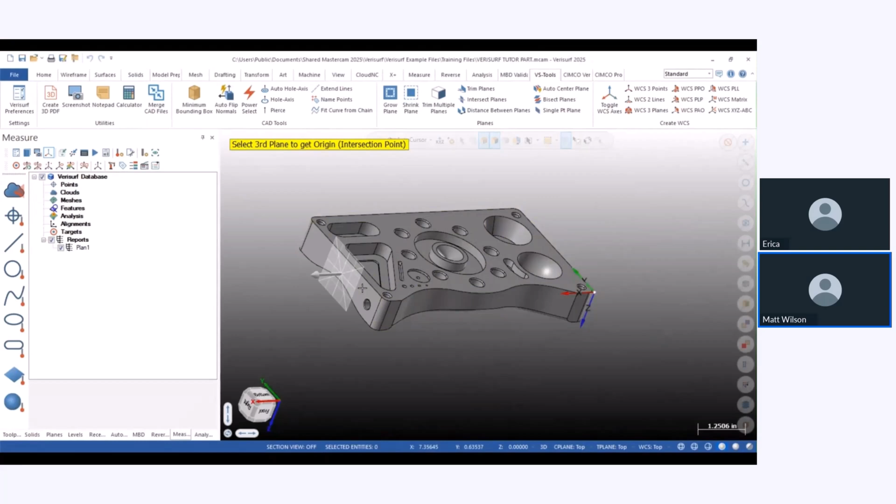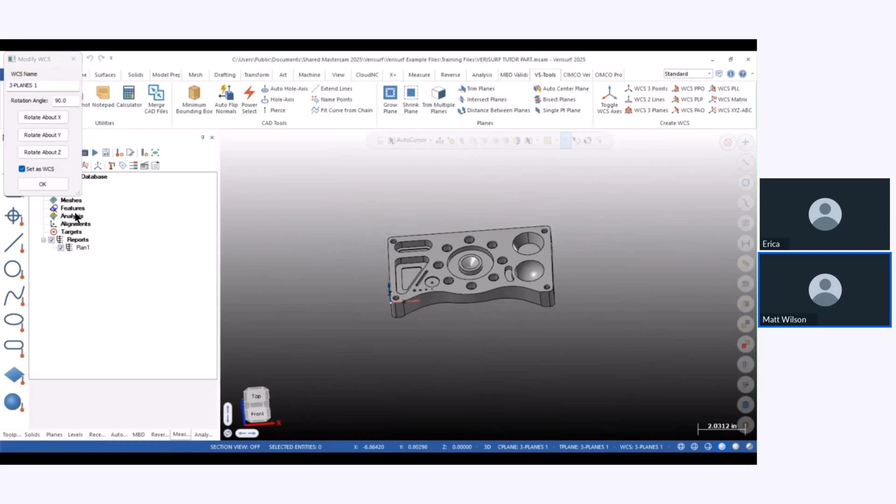So this is not how I'm gonna have it set on the machine, but this is super easy to fix. We just rotate about Z. Now I got my X facing the way I want it. So I'm gonna be looking at the part just like this on the CMM. My Y goes back and forth and my X goes left to right. So I'm gonna press OK. Now everything's how I want it.

I'm going to go into Automate. If you don't have this tab, it's under View and Automate. So we can go here and put this back on Verisurf. First thing I'm going to have to do is add my probe for my CMM. I'm just going to set this to default. So I got that set up now. There's my probe. Next step I like to do is add an auto align. This is going to be for my single point.

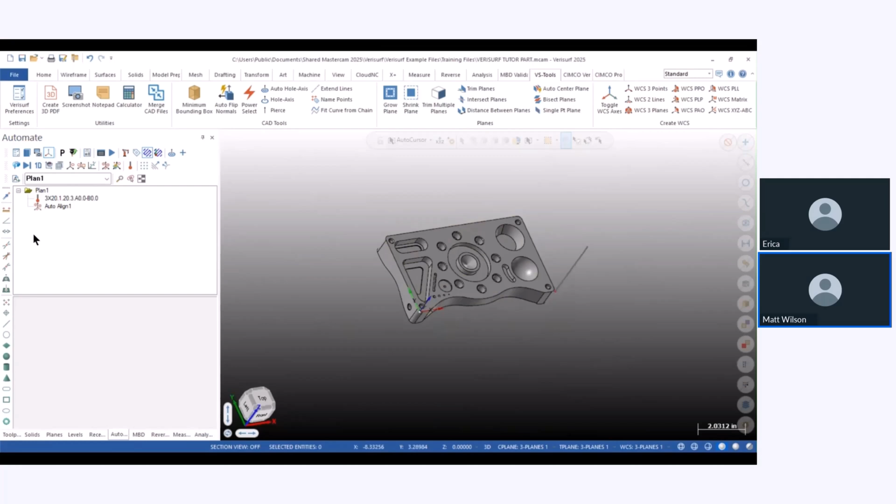I like to do a 1 point manual alignment, which works as long as your part is set up correctly to your WCS. I'm going to double click on this, make sure I have start device from base selected. That is going to mean that it clears all the alignments prior. So it's a fresh start, which is very critical on a CMM. I'm going to go in here and add another alignment. I'm going to double click on this one. I'm going to leave this off because for my second alignment, I want to use my single point alignment.

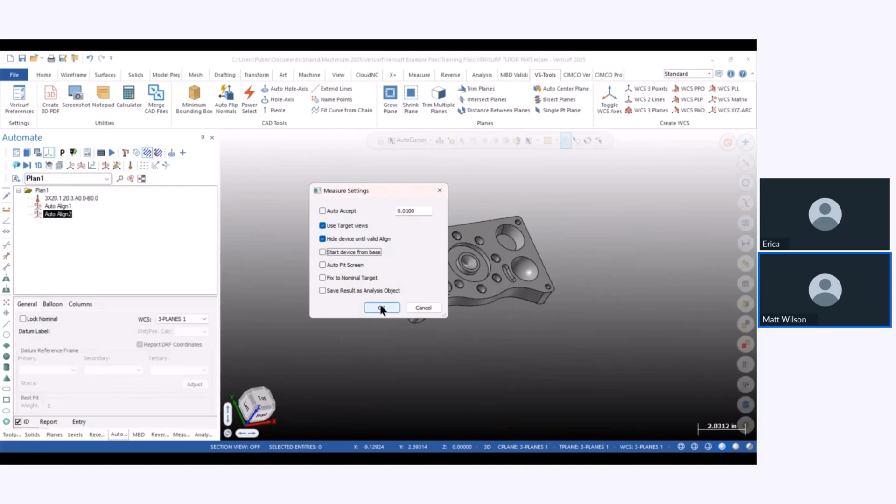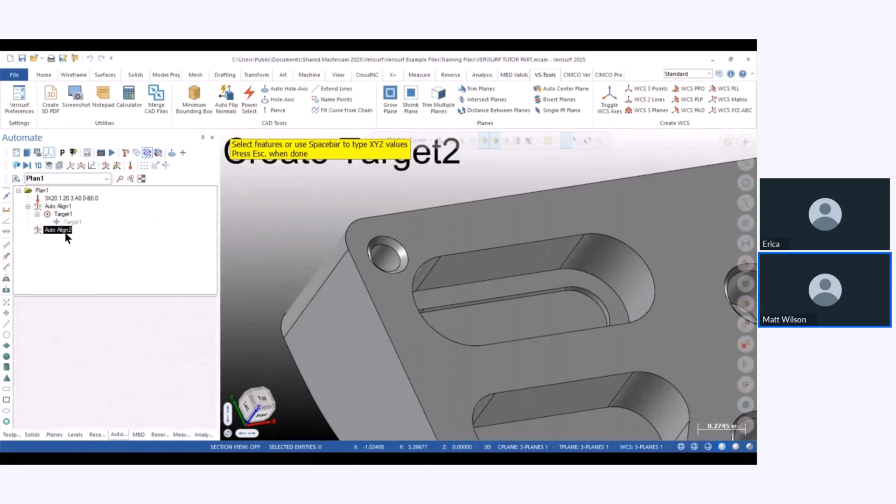So I'm going to go in here, create a target. I like to just pick it in the corner right here. It's super easy to pick up. Okay. I'm going to go in here and right click. I'm going to put this as a manual point so it does not automatically go over there. Then I'm going to press escape. I'm going to right click and create my targets for my automated alignment. I'll go here, here. And as we're doing this, you can see our path popping up on there. So we're going to clear, clear. So everything clears here.

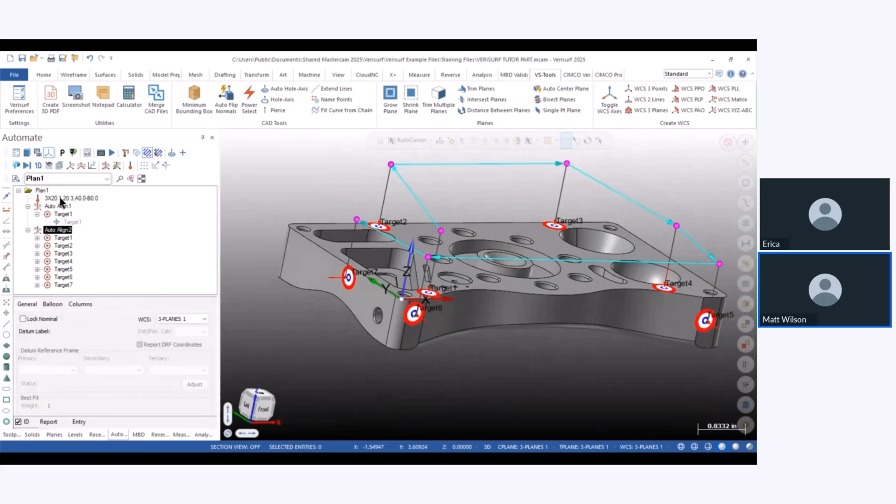Okay, so we're done. We can click on this alignment and see that everything's going to clear. We can click on both of the alignments together and see that my first point is going to go straight over here and it's going to clear. Because sometimes on other parts, this point might not clear and you'll have to add a go-to point in there.

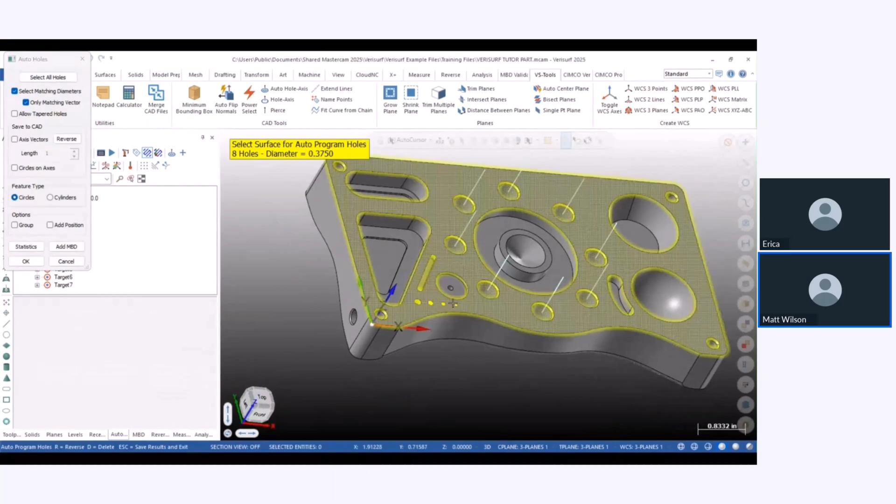So next thing I want to do is I'm going to measure some circles, which is super simple inside of Verisurf. We have this feature called auto holes. And what it does is as I click one feature, it's going to click all the similar holes to it. So if I was to click these or if I was to click those, I'm going to turn these ones off and just use those right now. And I have a feature type. I can do circles or I can measure as a cylinder.

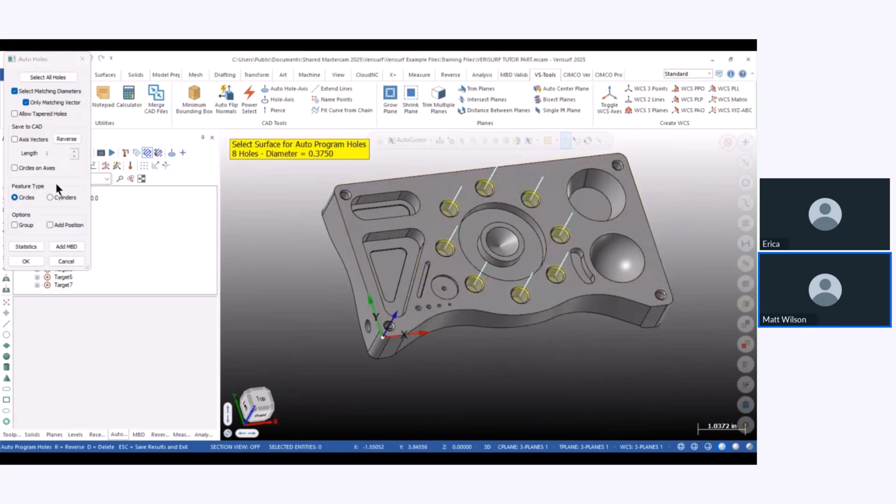And then if this was facing the wrong way with my vector, I could reverse it and now it's facing them down. So I'm going to go up and I'm going to not click all the holes. So we're going to get out of here. I'm just going to press cancel. I don't want all the holes. So I'm going to go in here, auto hole, just click these, vector's facing the right way. Okay. Now it's automatically going to click all those holes in there.

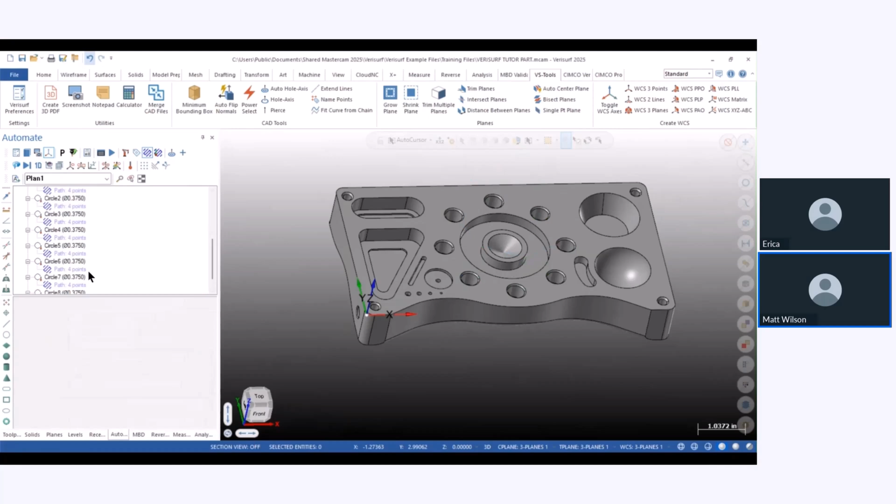And the thing I like about auto holes is that it puts the size in there. So if we were to pick multiple different sizes, it would sort them by size. And we can always come back after the fact. And if we did not like a pattern for the arm, let's say, we could right click and we can sort these by direction, distance, name, however you want to do it. But distance and direction will sort it out for your arm to be a little bit smoother of a process where you're not jumping back and forth across the part.

So I'm going to grab all these and take a look. So I can see that these aren't going deep enough for me because of that countersink. So I'm just going to right click, generate path. And right here, I can see my depth is at 0. So I can just drag those down a little bit. And now they all look good.

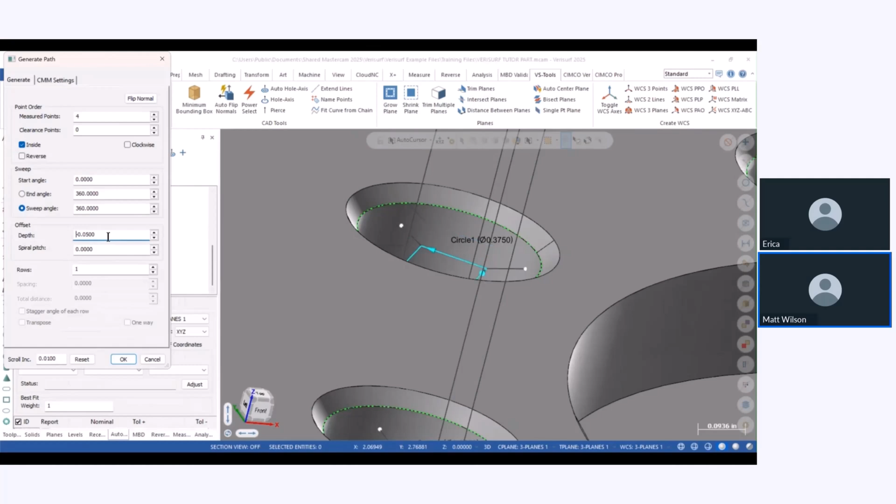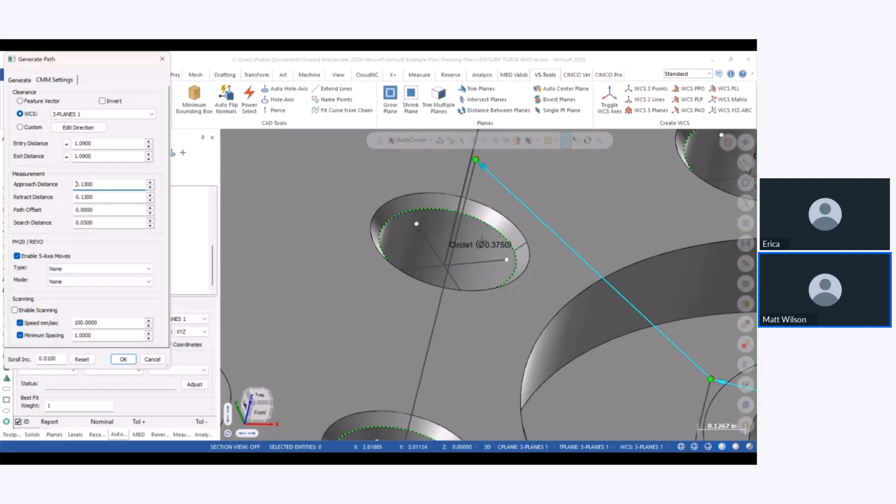I'm particularly programmed for a PH20, which I would like to keep my point right in the center so that my CMM doesn't move, only my PH20 moves. So I'm going to change my approach distance to bring that center point right in the middle. That way I get no movement from the CMM and everything's done with the Renishaw head. Okay, so now those are all programmed.

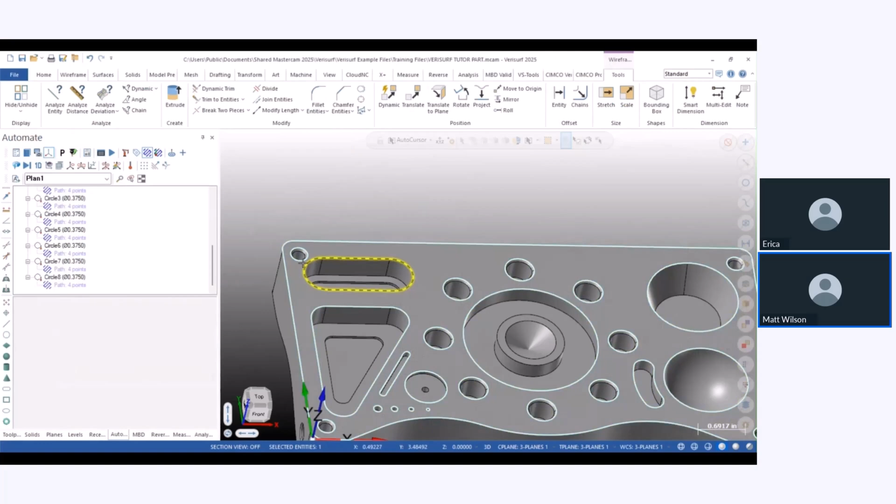Let's say I wanted to do this slot. So there's no wireframe on this right now, so I can just click this feature right here, curve on all edges, cool. Now I got some wireframe. I can click here, plus sign, and it automatically adds in my slot here. Again, I'm at 0 on my depth, super easy to adjust. Generate path, and I go in here and I change my slot, you can see how it's going the wrong way. That's not a big deal. It's just based off of the normal. So we'll adjust that and then we can go negative.

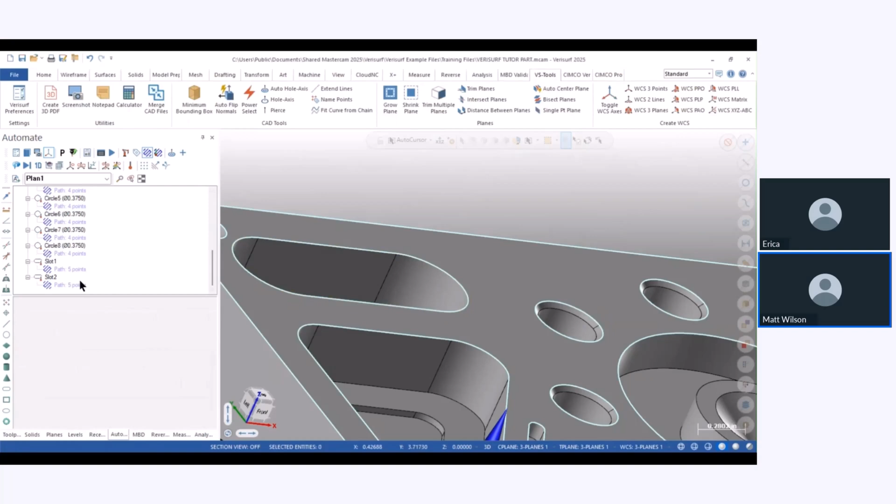And if I press OK and save it, if I was to pick this slot again and add it, of course it went the wrong way again. I just flip my normal and go inside here, generate path. Since I flipped my normal, I need to go in here for it to reference it, but it puts them back in the same spot again.

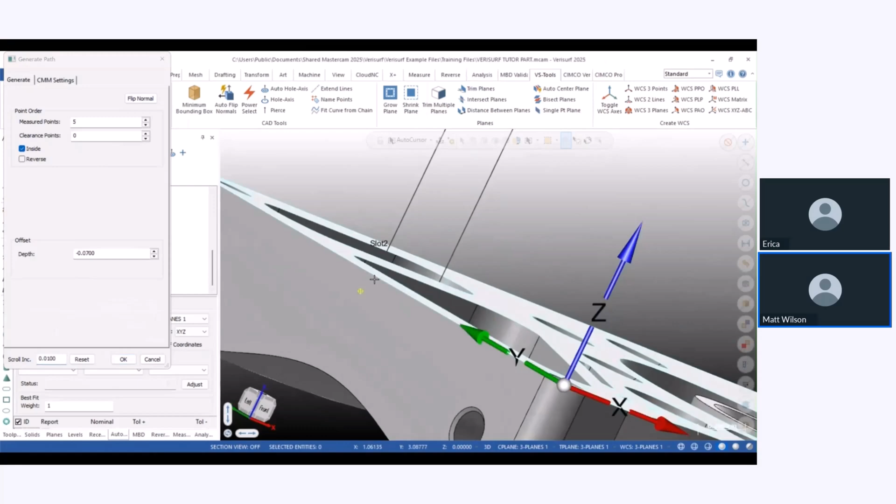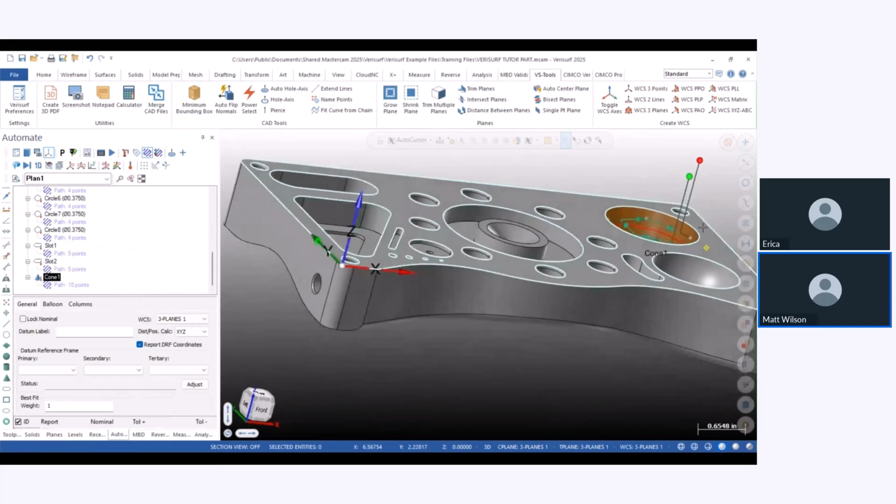So I go here, let's say we want to add a sphere and a cone. We can just add those in there. It's going to automatically generate a path for the cone. We got our path in there. If I want to add this feature, add it. Gave me 5 points. If I don't like those, same thing, go in here, generate path.

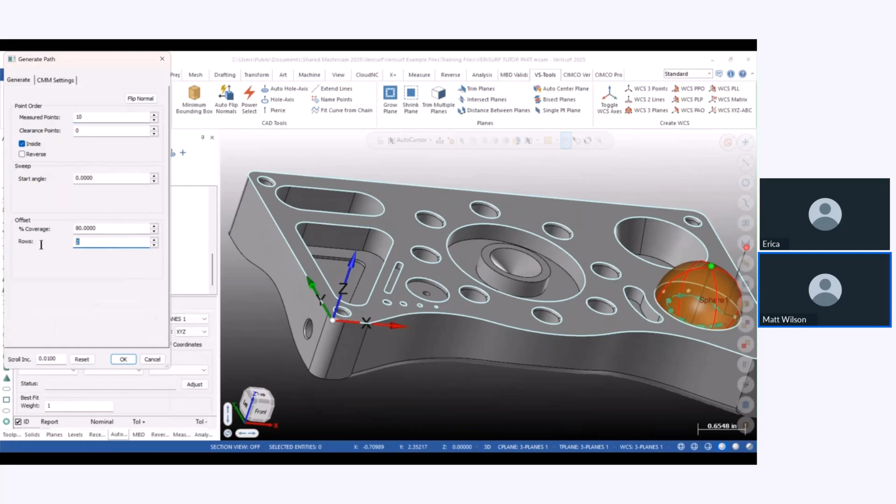Super simple. I don't want 100% coverage because it's going to hit the edges, so I can go, let's say 80%. And let's say I want to do 10 points and 3 rows. So now we can see I got 3 rows and it's not coming right up the edge. Okay. And again, if we want to make sure everything's clearing from feature to feature, just click the 2. We can see that our point going across the top is clearing.

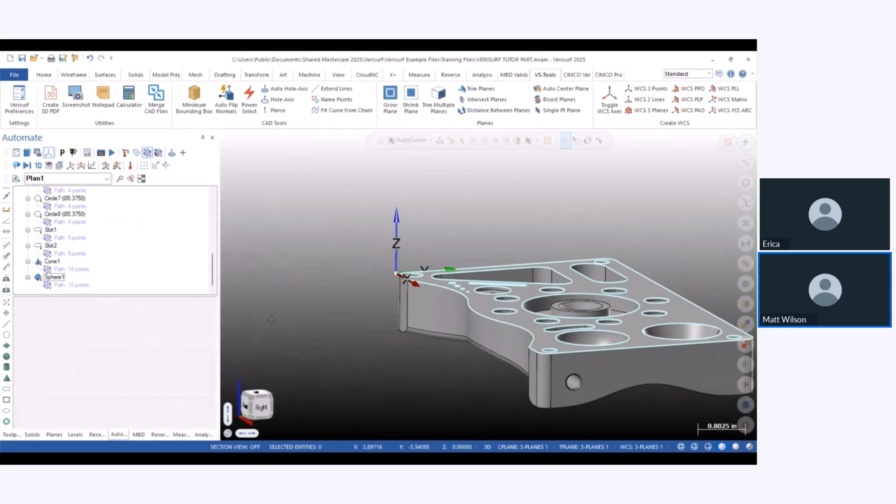Let's say we want to add a surface. We add a surface. And then there's 2 different types of ways of adding surface points. So we can click on here. We can say, let's add some points on here. We can manually place them.

Okay. So now this path is manually placed, or we can click right here and we can do surface grid and click it on here and it does like a pattern. And we can go UV number, and this is the row and the column. So we can see, we can adjust it as we like. And we can stay away from the edge a certain amount.

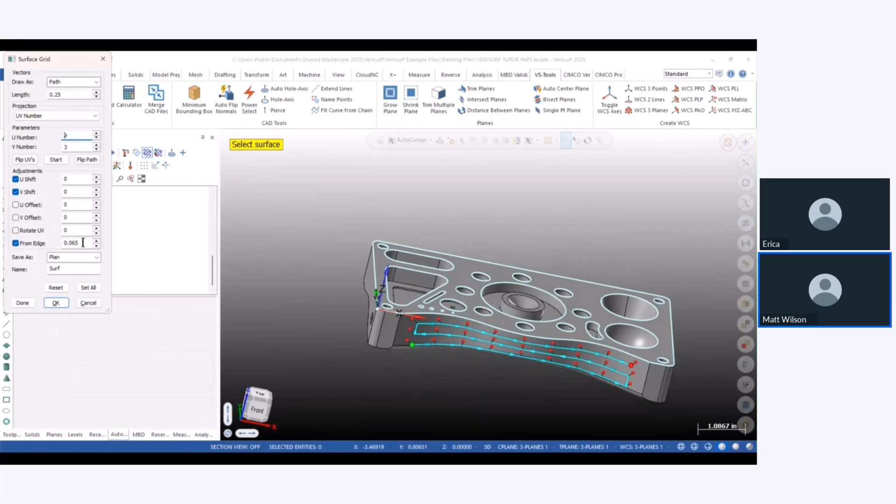We can change this where it keeps it a little bit close to the edge, but sometimes that might not be the best case. So we can kind of shrink that up. Okay. Now we can click both of these and see if they're going to clear. We're all good. We don't need both of them. So we can just delete one of these out.

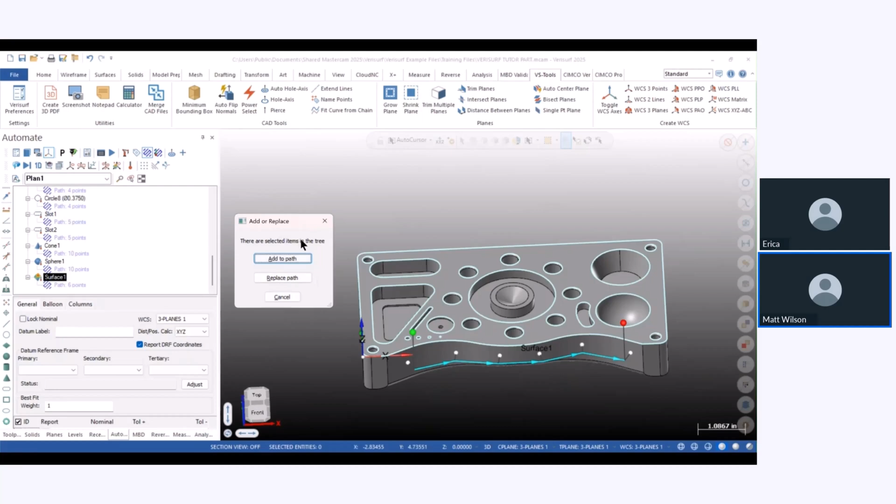And let's say we want to measure this top surface. So we can do a surface grid. Oh, so this popped up because I still had this feature added and it recognized that there were points in there. So it's saying, hey, you already got the points on here. Are you adding them or are you replacing them? I'm just going to press cancel, click off of here, and I'm going to click this top feature.

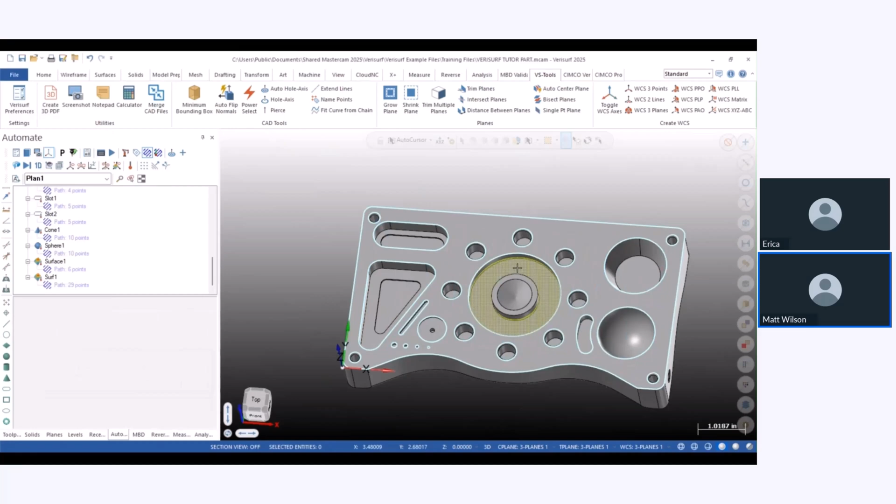So we can see it didn't really put that many points on here because they all ended up clashing. So we can turn this down to, let's say 0. We can kind of adjust these a little bit where it gets more points. And let's just press OK. Let's say some of those points ended up a little bit too close. So let's say this one over here, we don't really like it. It's super easy to edit that.

We just right click on the path and say edit path. And now we can drag anything we would like to around. Like I said, most of the time you're not doing this, but sometimes you might get stuck in a situation where the path is pretty dang good except for a couple points. You can always just go in there and edit those points specifically.

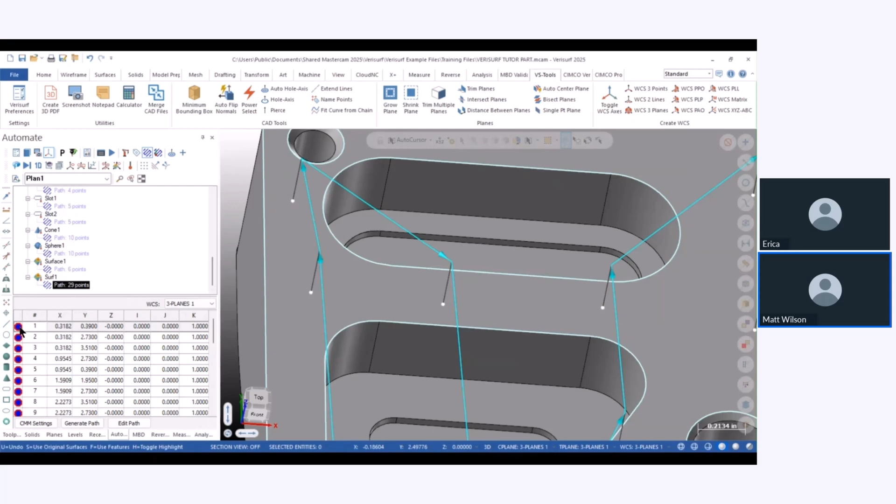And also inside of here, this is a blue point, which means it's going to measure it. If you want some of these points to not be a measured point and you want it to be more of a clearance point, like let's say you're kind of going over something somewhere, we can always just turn that point off, and now this becomes a clearance point. What else we got in here? So we went through features, we went through surface points.

So what else we can kind of do with our plans inside of here with Automate is we could put notes. Notes are super handy for arms. Like let's say you have somebody out on the shop floor running a part that isn't familiar with it. We can create a note. The notes get edited inside the report manager. So we double click on it. It's going to pull us right into the report manager.

Inside of here, we can have this comment do a few different things. We can have it where it just projects a note. Check probe. We can have it where it opens a file, or we can have it where it opens an image. If we use image, it's going to open it within the comment. If we open a file, it'll open it with whatever you got set up in Windows to open an image, which will open it a little bit larger.

What I have a lot of customers do is I have them pull up the print automatically, and I also have them do a comment to pull up a picture of the setup, because that can be a lot of time savings. And it's really nice to have that all in the plan where anybody can run it, and it makes it nice and simple. That's kind of a quick overview of Automate.

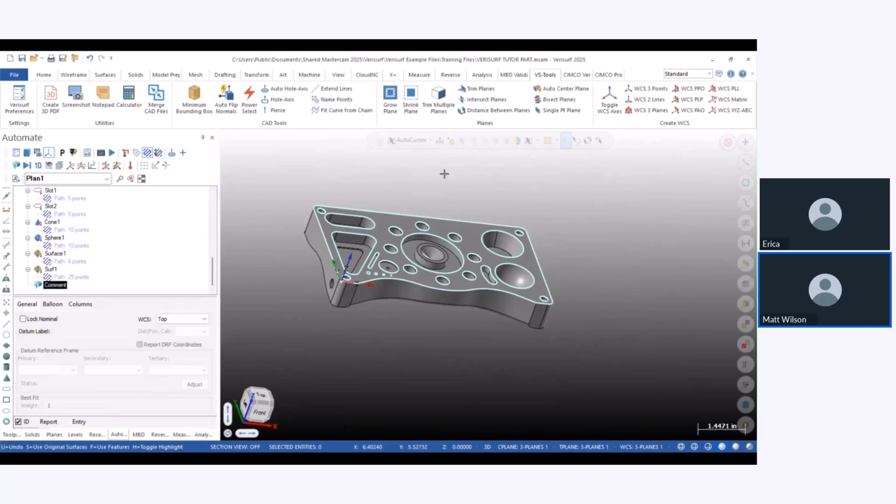You guys have any questions, let me know. And then we'll jump back into something else.

All right, so that was kind of like a getting started, going through the basics. I'm going to take a look at the chat or the questions. If you guys have any questions or want to see anything, just put it in there, and otherwise we'll jump on to the next presentation. See nothing? Not yet. I'm just going to jump on it. We can always go through all the questions at the end.

So I want to show you guys something here with manual constructs and stuff like that. Let me pull this up and we'll go through some more stuff. Okay, so somebody asked about constructed features for print, if you want to do a whole pattern or an angle or a distance. The distance was particularly mentioned.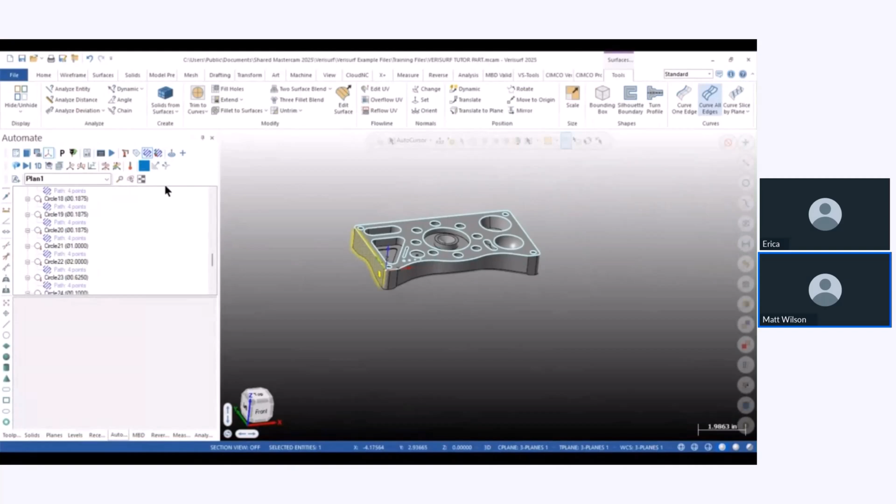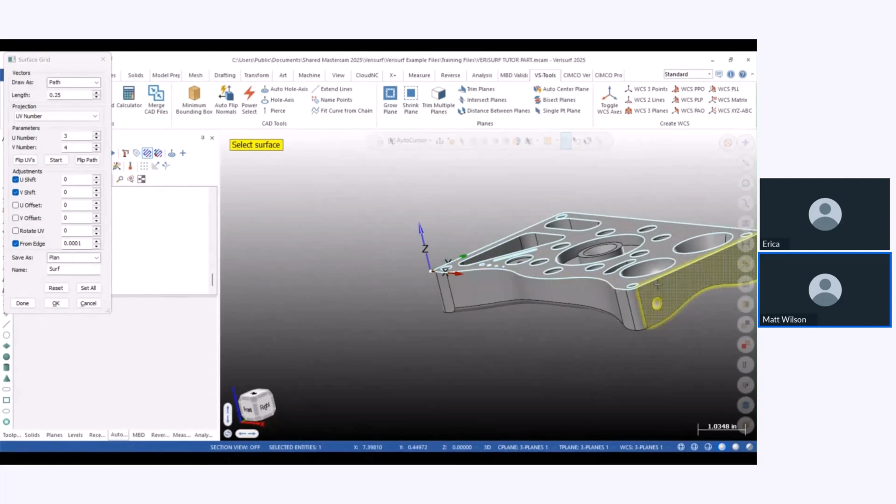That's pretty simple, but let's say we want to do an overall distance on this part. So we would measure this plane right here. Let's go less here and more here. Let's say a couple rows of points. Okay. So we're going to press done. I'm going to go over here, click this surface, done. Let's say we want to do the back and the front.

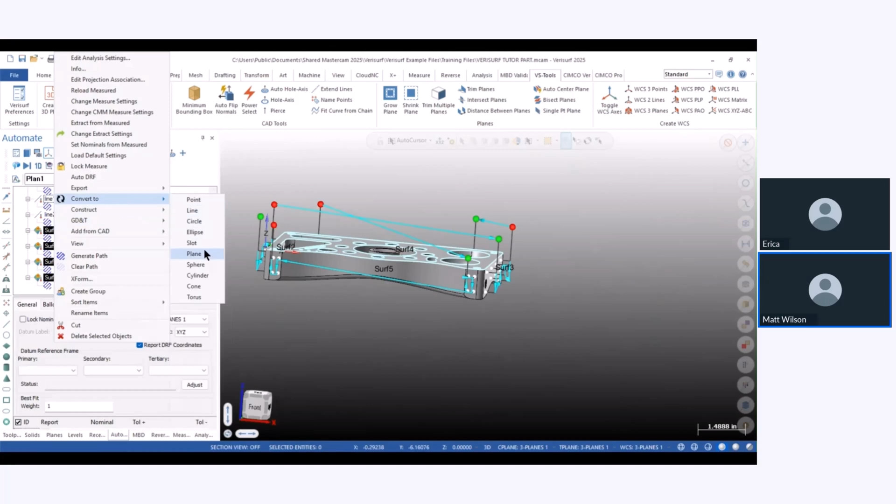So done. And then I'm going to click here and here. Actually, I'm going to unclick here. I'm going to change this a little bit. Let's do a couple points by a couple points. Okay. So then what we can do is we can take these faces, all these, and we can just right click, convert to a plane. They're all planes now.

And it's super easy to pick these two. Right click, construct a distance. So now this is going to give me a distance between those planes. We have a couple different options here. We have a distance in X, Y, Z, and we have a 3D distance. A 3D distance isn't really what we want because that's going to go X, Y, and Z. We just want a distance on X across the two. So we'll just click here, and this will give us a distance on X.

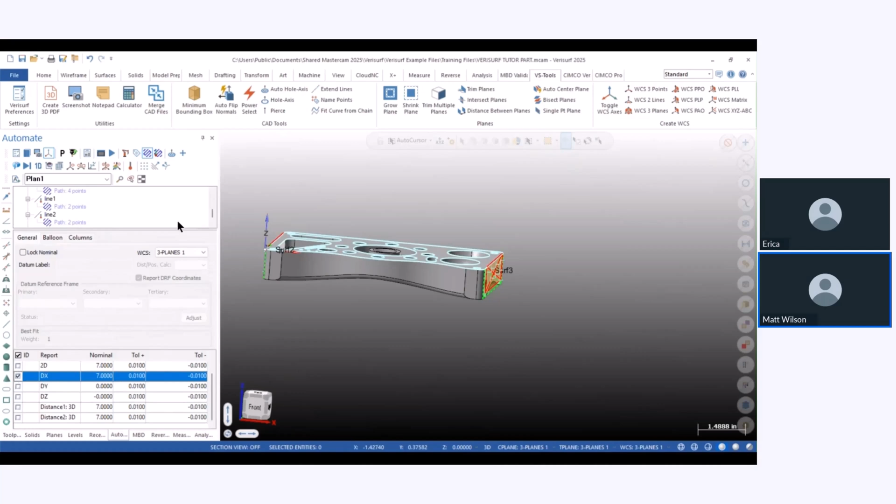Let's say we want to do a couple lines. I have a couple lines right here. Let's say we want to do an angle. So we can take these two lines, construct an angle, and now we go right here. This is giving us an angle between those two features.

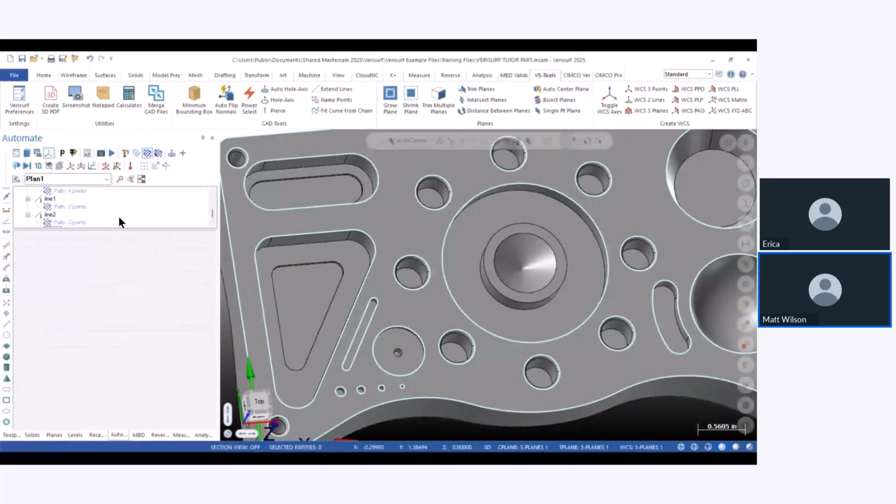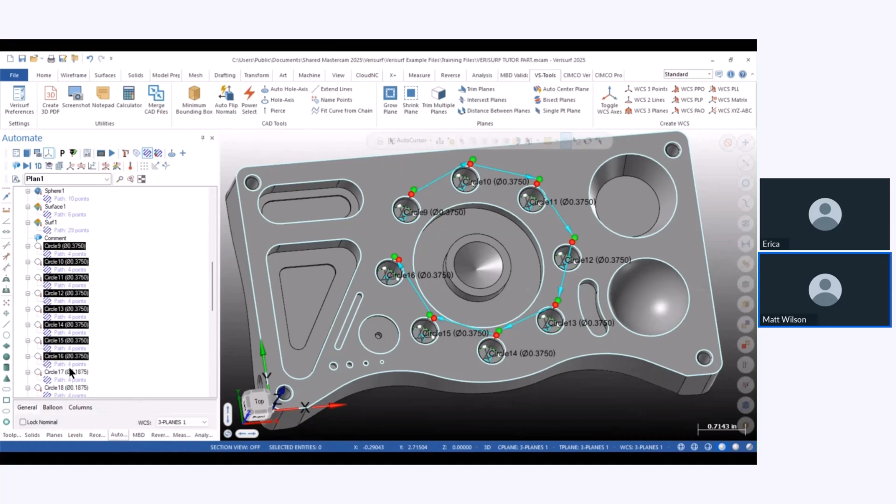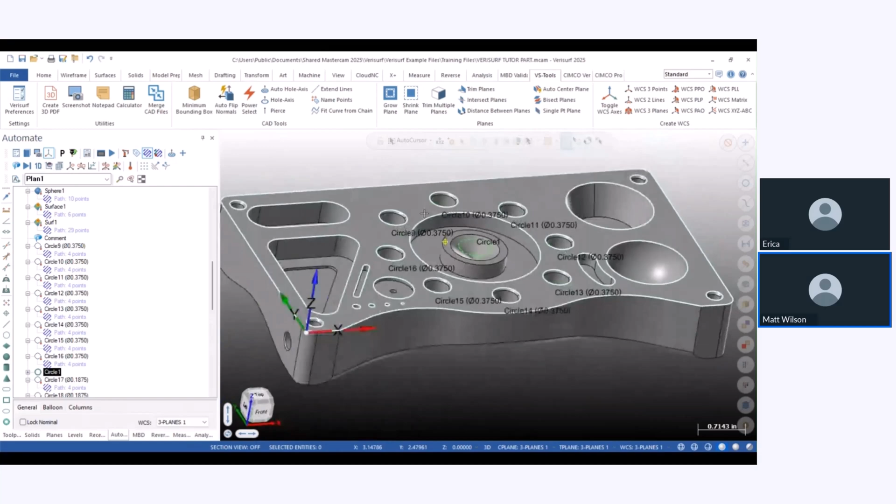If we want to do, let's say, a bolt hole pattern, let me shrink this down. I got all the holes in here. Let's just grab these features. I'm going to grab those and do a right click. I'm going to create a circle. Construct a circle. Now I have a circle that's actually constructed from all these features. So this will be my bolt hole circle.

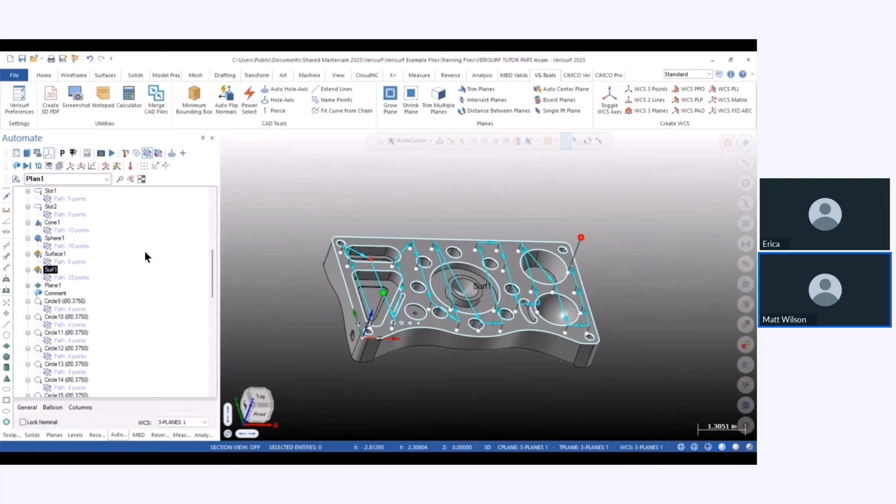If we want to do an intersect, we can also do that. Where did I make a plane? Let's take this and construct a plane off of it. So I'm not converting it, I'm actually constructing. I left that as a surface because I wanted to report out the profile. And then I got this plane here, and I can do an intersect to, let's say, this plane.

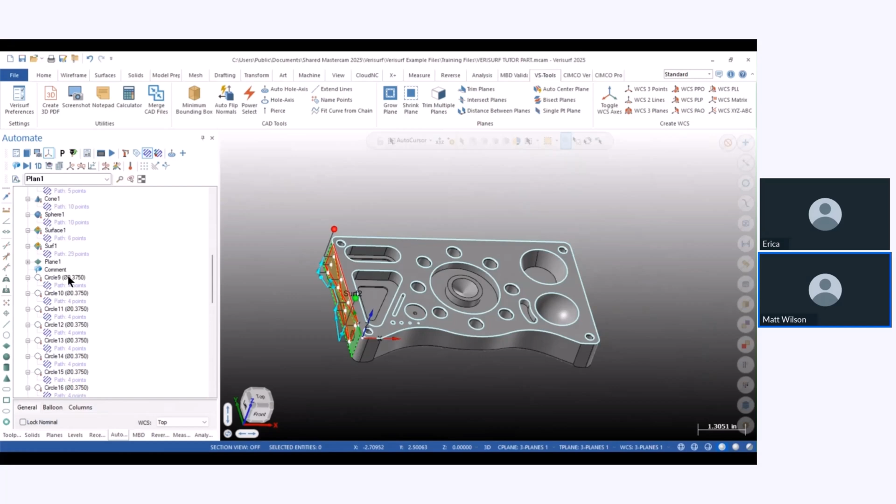I'm going to click Surf2. I'm going to come up here and grab surface 1. I'm going to right click, construct a bisect. So now what I'm going to have down here is a bisect line or a bisect plane from where those intersect.

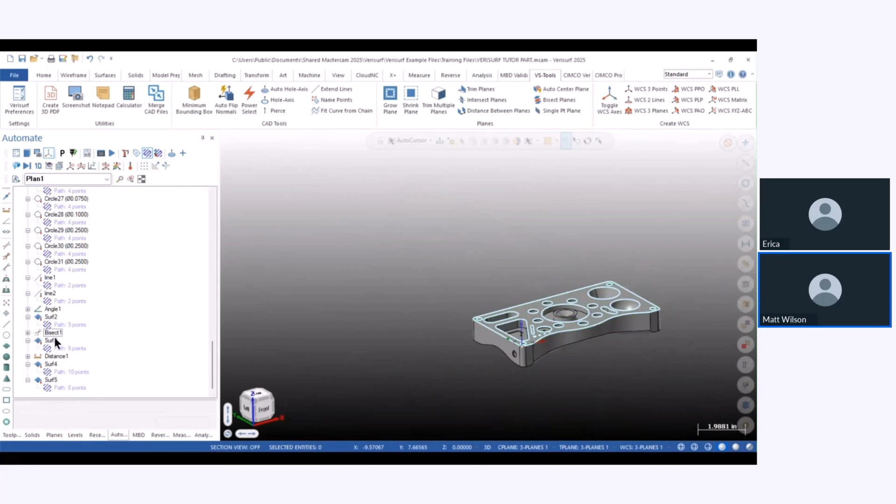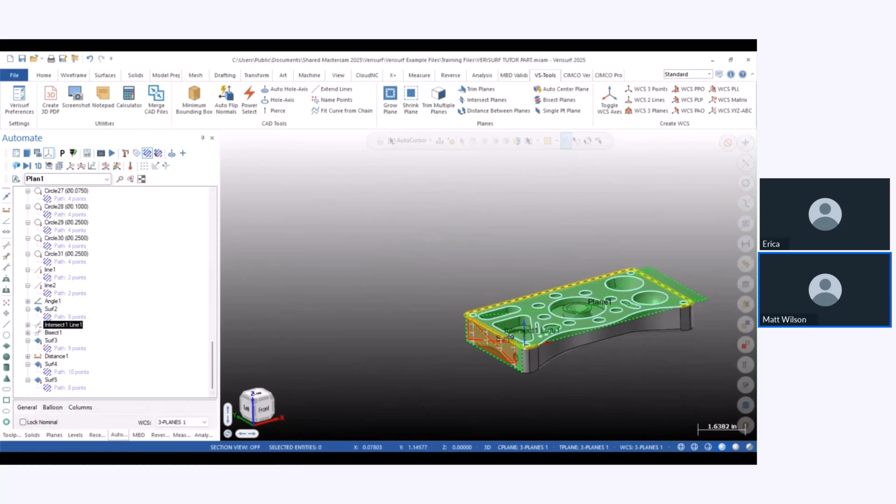If I want to do an intersect, same thing. Pick a surface. Pick the other surface there or plane. Construct an intersect. And on an intersect, I'll get an intersect line. So we can see my intersect line right here on the edge.

You guys just hit me in the comments and tell me if there's any other common constructs you're doing that you might be a little worried about having a way of doing, or how you would like to see it. Just send me a comment there and we'll run through it.

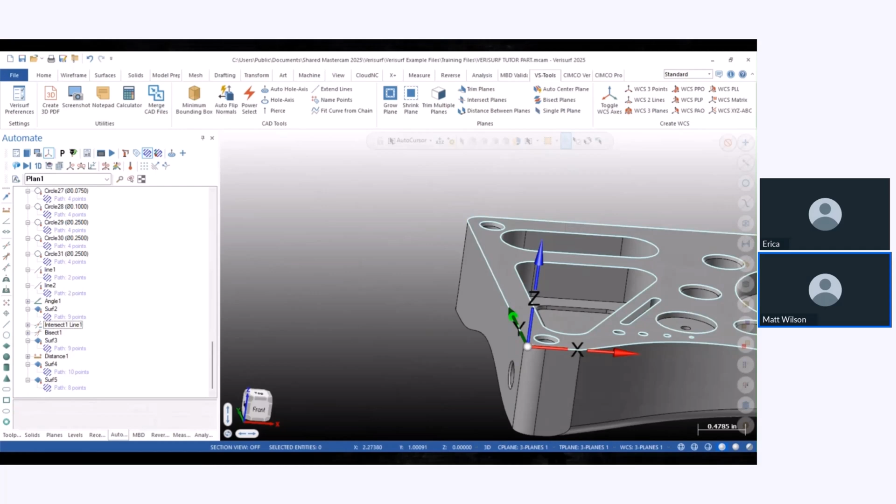All right, so I got a couple different questions in here. In Automate, do you tolerance the same way you would manually? In Automate, do you tolerance? Not quite sure what you're asking, Mike.

I don't know if I can. Let me try this. I'm going to do live answer. See if that gives you control to talk. Nope, that didn't do it.

You still have to enter manually. Well, yeah, so the tolerances you're going to have to still enter manually. Actually, can you show us how you would do true position? Let me show one last thing for Mike, and then I'll answer your question, Jose. I want to show you something: you will have to enter it all manually unless you have MBD. And let me show you how you do that, because that is actually super easy inside of Verisurf. Give me a second. I'm going to pull it up again.

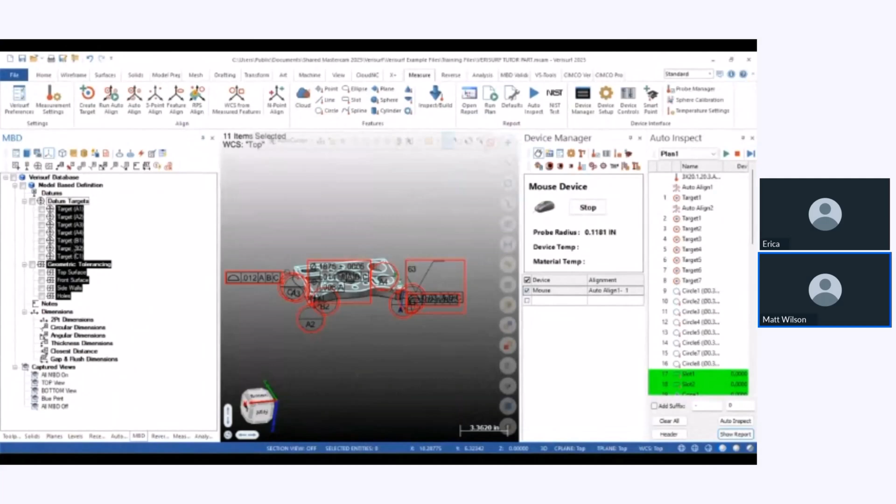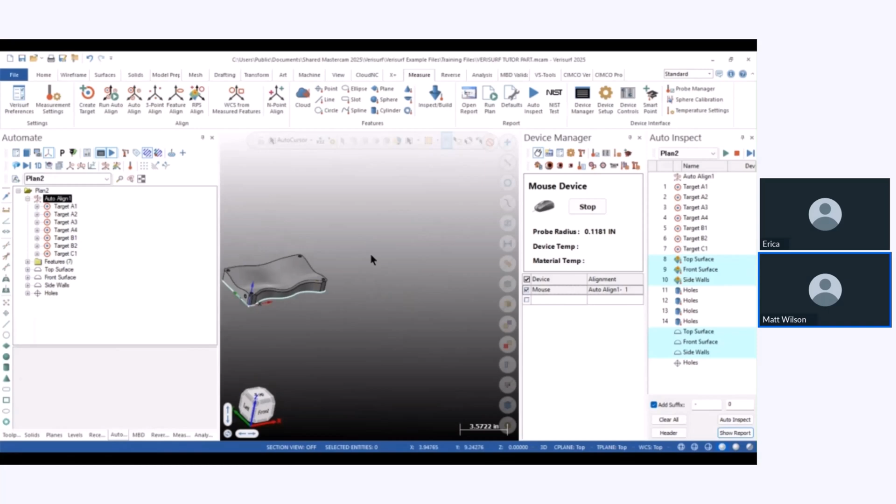Pretty nice feature within Verisurf where all we have to do is grab the MBD, right click, plan, create a plan. What that does is it takes the MBD from the print and all the relationships to surfaces and all that from our GD&T, and it creates a plan. So if we go in here, this plan has automatically generated an alignment. It's automatically generated a surface path on all these, and it's automatically generated paths for our holes.

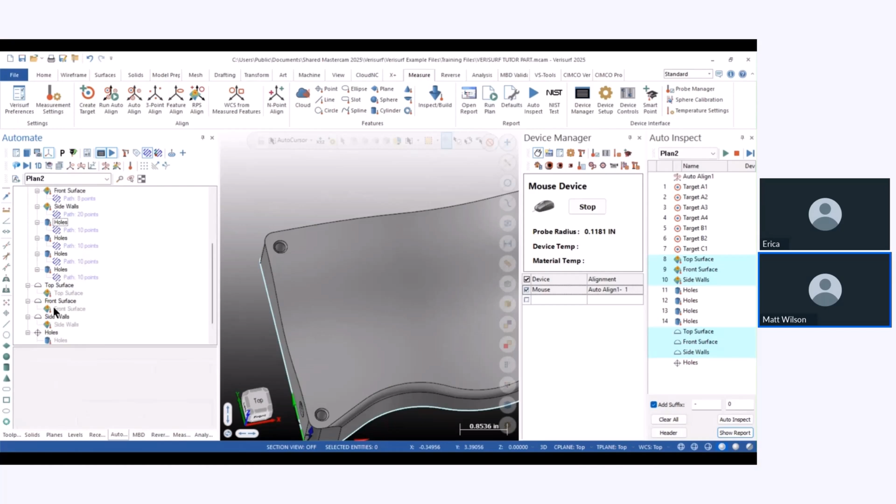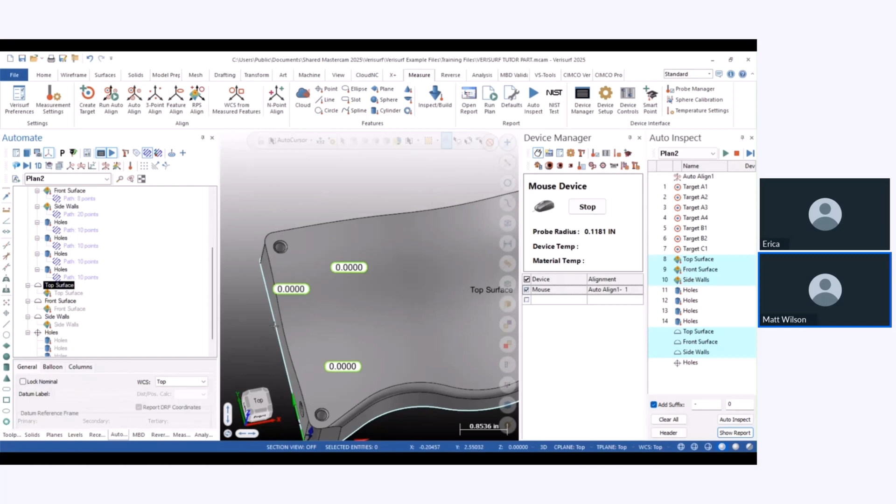And then it also generates all the GD&T callouts for those features automatically for our true positions and for our profiles of the surfaces. And inside of here, what's real nice is it actually grabs the image. It sets our tolerance to that image because this is all assigned within the MBD. So everything is automatically done for us. Tolerance and everything. This report's pretty much ready to go out other than setting up a header. So that was just something real quick I wanted to add in there for you guys. That's a real nice feature for the people that get MBD on their models.

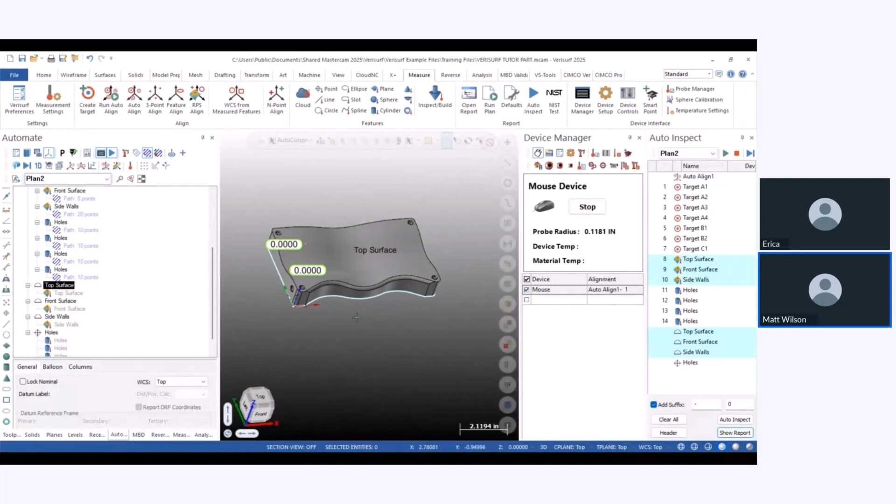All right. So, Mike, hopefully that gave you somewhat an answer. But yeah, you're going to have to manually do tolerances because Automate doesn't know what the tolerances are until you set them. They're all just going to be defaulted because unless there's MBD, nothing's assigned to the features that you're picking. If there is MBD, it'll pick that stuff up. And it says, can you show how to do true position of a couple holes, define datums? Yep, I'll do that. And I also got a question, project, pierce point, and vector point. Okay, so that's pretty simple.

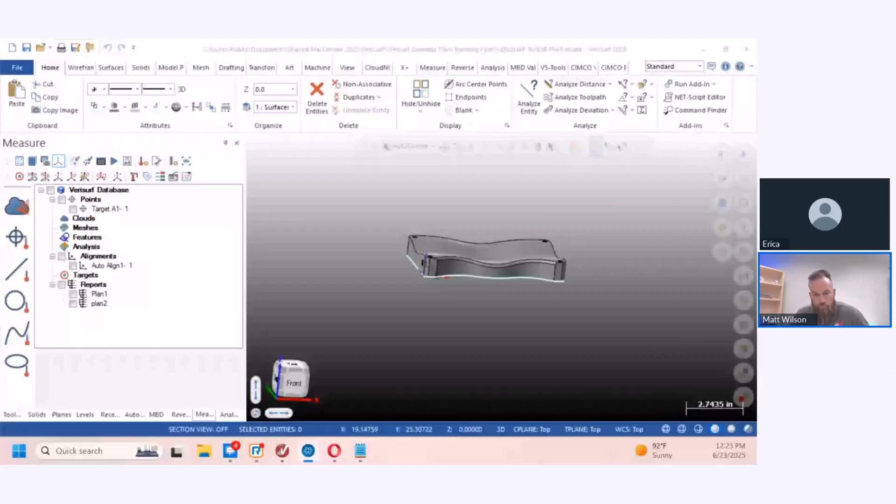All right, let me share my Verisurf. I'm going to put it on my other screen so if you see me looking away. Share. So here's, it might have not. Is it still sharing? Give me a second.

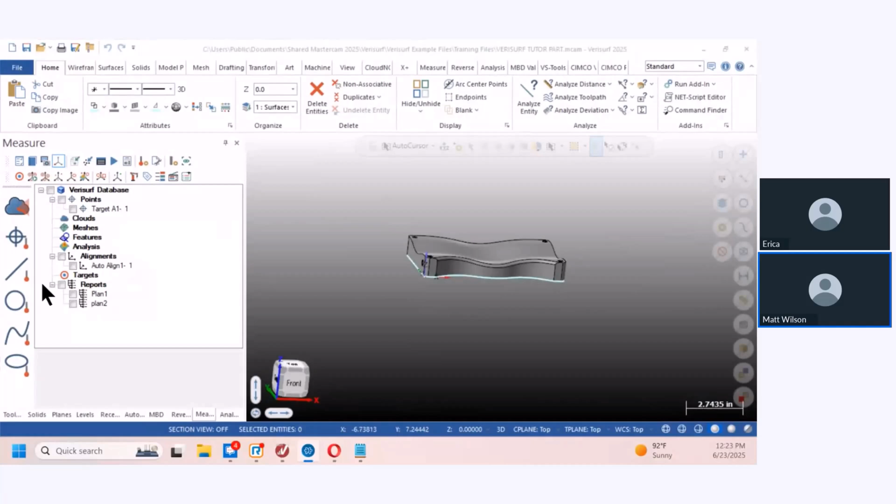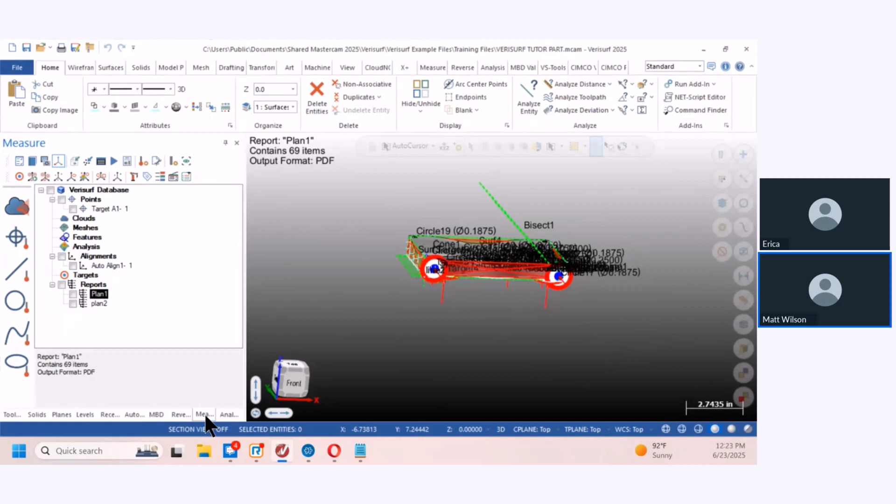Okay, so here's my plan 1 and my plan 2. This is my MBD plan, this is my regular plan. So first I want to show, let's just do a hole pattern or a true position real quick. Automate. Oh, I know why. Automate. So let's say we have plan 1.

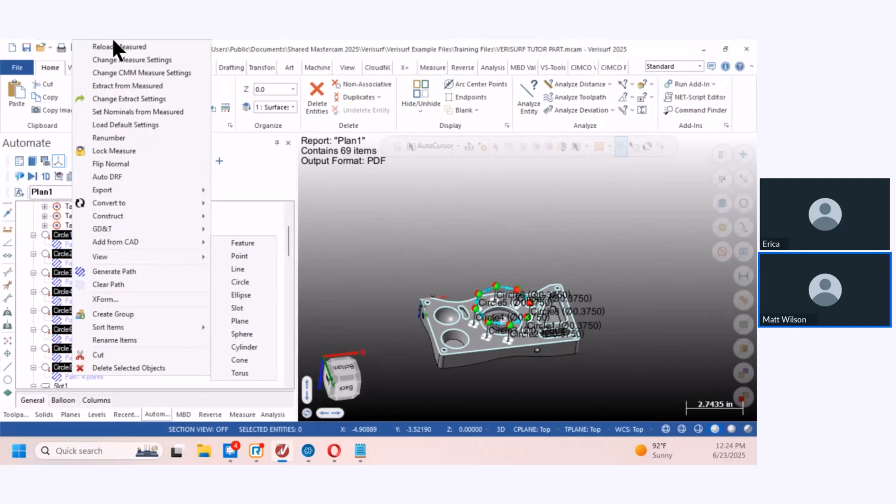So here's a group. This will be considered a pattern of holes that could possibly have a true position. So what we would do is we would go in here, right click, GD&T position. This gives us a true position. And within here, I'm going to open it up inside of the report manager actually, because that makes it a little bit easier to see what I'm doing. So let me put this on the screen.

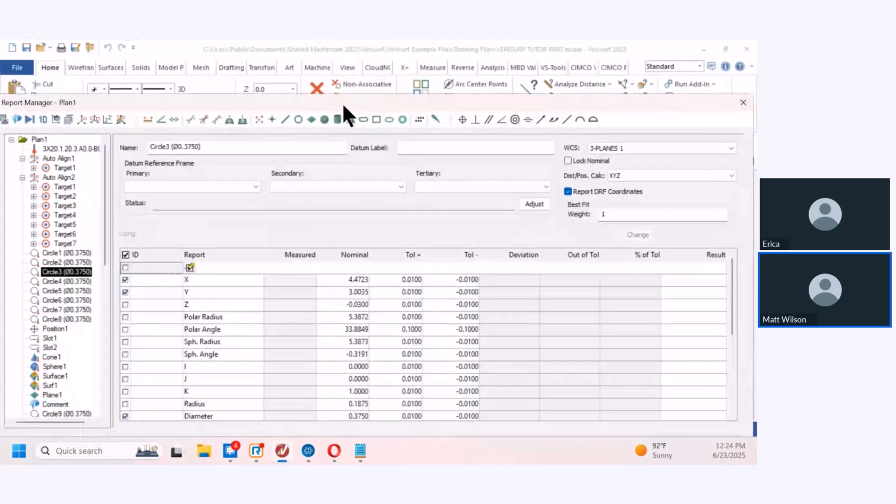So inside of here, here's our position. So we have our composite position, our composite with the MMC ID. So we can do like a maximum material or a composite. And you asked about doing datums.

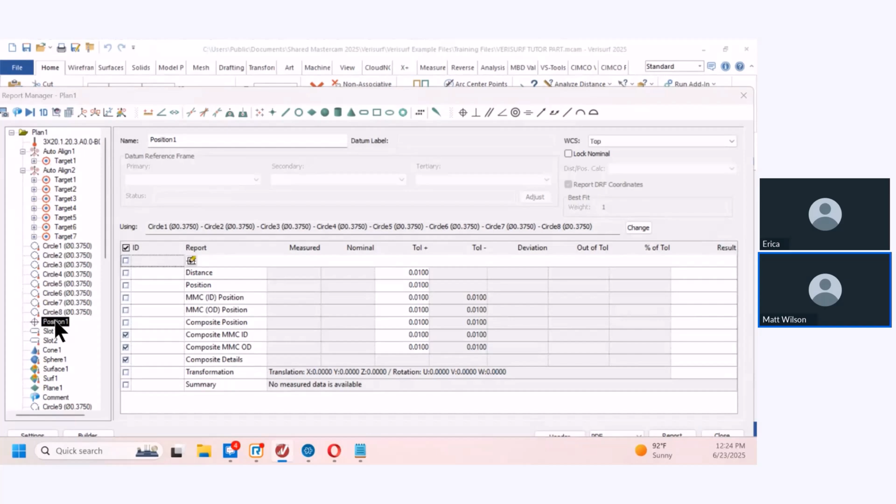So I didn't set up a datum reference frame inside of here, but what we would do is set up a datum reference frame. And inside of here, if you double click on position, it pulls up options. And if we had an A, a B, and a C in here, or D, E, F, whatever it might be, you would set it up right here, and it would automatically create that for your composite position.

And then somebody else asked about how you would pierce the points. So the way I do mine is, if I double click on here, it pulls up my settings. I just project mine on nominal. So you can either project on nominal, or you can pick this to be, let's say if plane 1 is our datum A and we want to pierce it to datum A, we can do it that way.

But like I said, with Automate, I usually do project on nominal. That just pierces me right to the surface of the CAD because I'm only looking for X and Y on the circle. It's not really going to change anything if it's on the A datum or not.

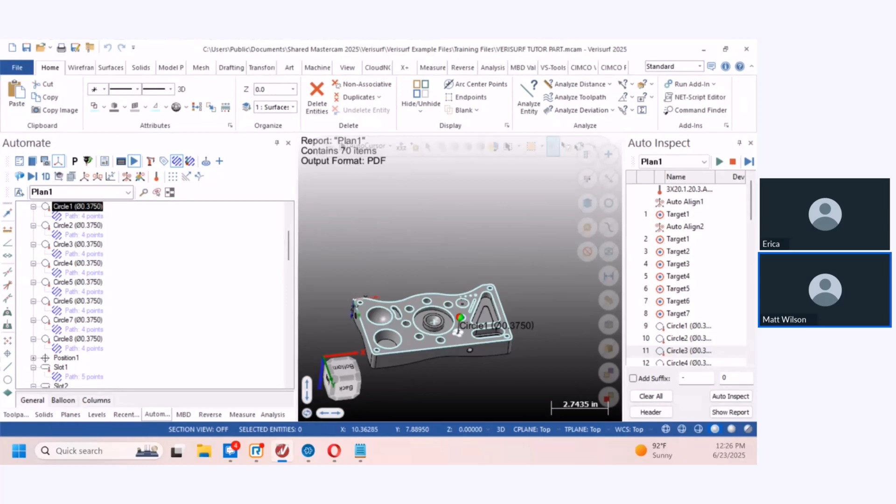Vectors. So Justin said vectors. Vectors question mark. So if I just click on here and I press letter V, wait a second. If I go to measure, this is all my vectors for everything right here. So you can see my vector, my hole's facing straight up. Is that what you're asking, Justin?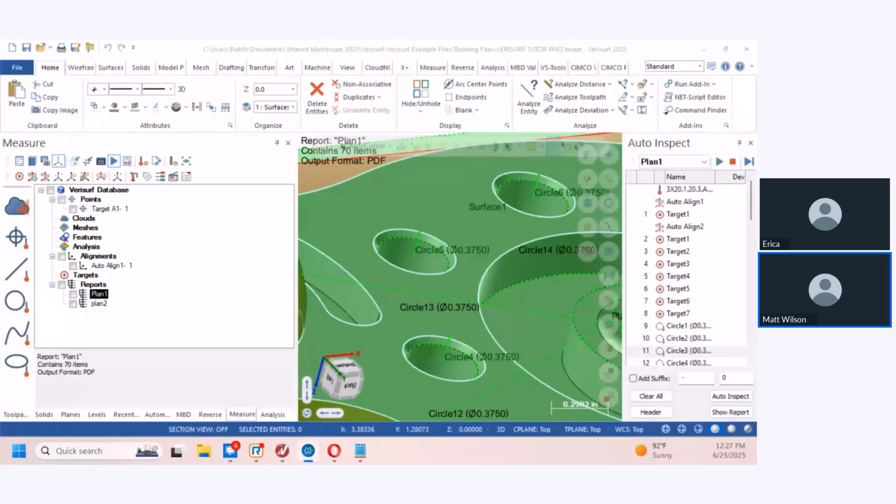Triangle on the, can you see the chat? He said something. I have call outs of a pierce point and vector at surface. Oh, yeah. Okay. Nope. I get it. That's super easy. So oh, wait, you can talk now. Justin? Maybe he can't. Either way, I know what he wants.

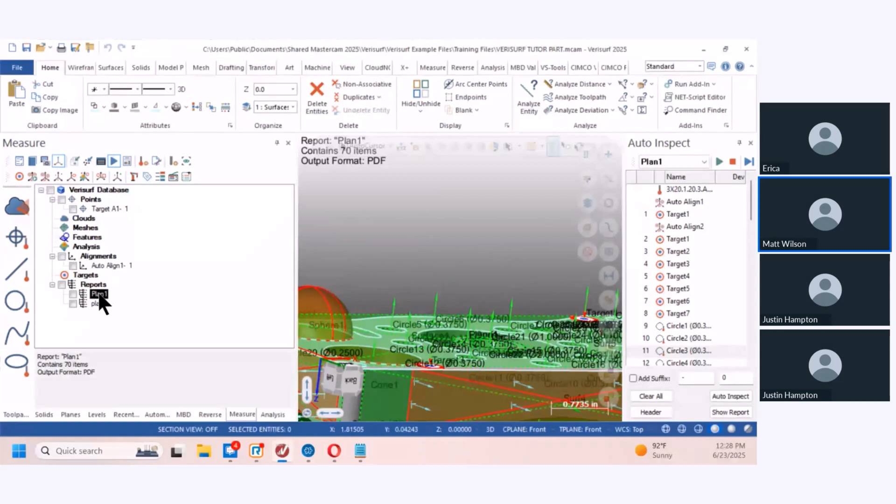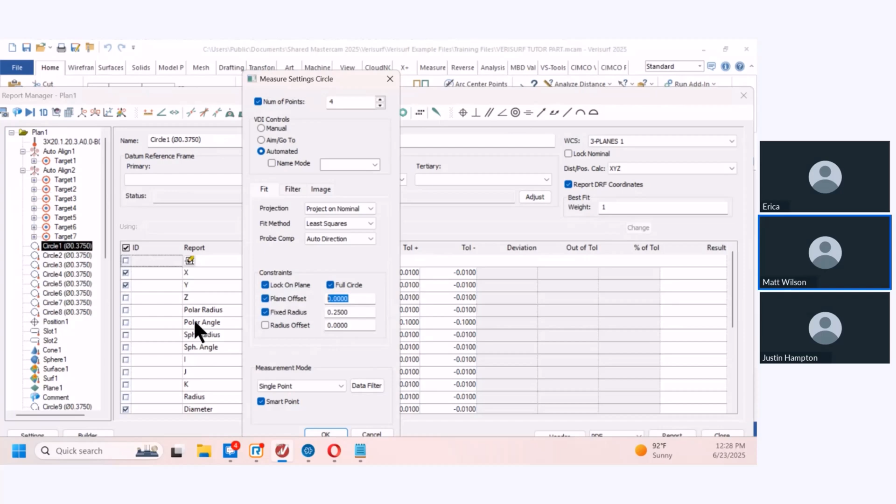He wants a projected point. So basically what you do, Justin, is inside of here, let's say circle 1, for example. So let's say you want to project it off of the surface. So you would not pick nominal. You would pick the plane like A or datum A or whatever you call the plane, plane 1, plane 2. And inside of here, you would do a plane offset. So I do a plane offset off my nominal and I press OK.

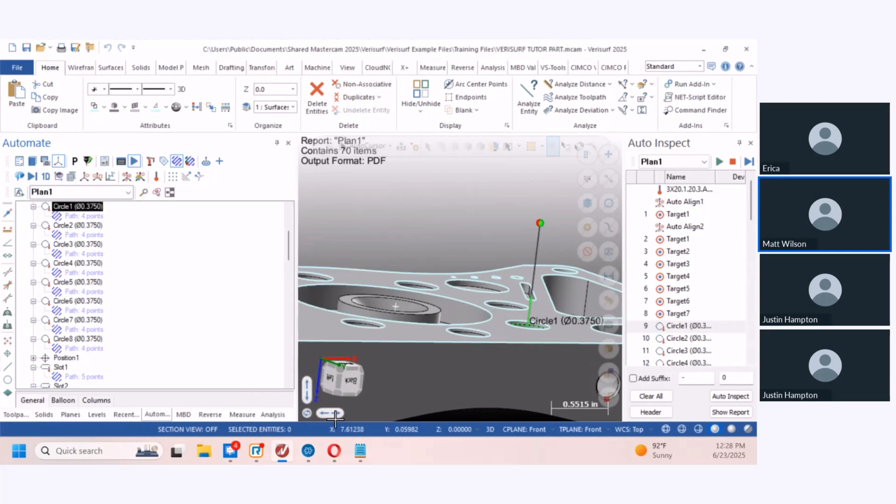I close this down and I look at my plan. Circle 1, I didn't do it. Give me a second. See if I can shrink this down so we can see what we're doing. Let's do it inside of here so then it will show us. So here I'll do plane offset 2 inches. Okay. Project on nominal. And I press OK. If I'd measured this, this would project that point up 2 inches. And that's pretty much what you want.

It's basically a projected point. They kind of do that for like tool balls and stuff like that. Basically, wherever the feature is going to mate to, it might be 2 inches away. Does that answer your question, Justin? You had to put it as a question again. I don't know how else to do this. Sorry.

Is Verisurf an add-on for Mastercam? Meaning, so Jose, you can just add it onto an existing seat. We've done that before. But yeah, Verisurf comes with a design seat. Basically, you get a design seat of Mastercam when you buy Verisurf, but there's no reason why you can't just add Verisurf onto your existing Mastercam, as long as you understand that that seat is going to be taken up while you're programming or using Automate.

And then, audience can see the chat if they click the Q&A. Okay.